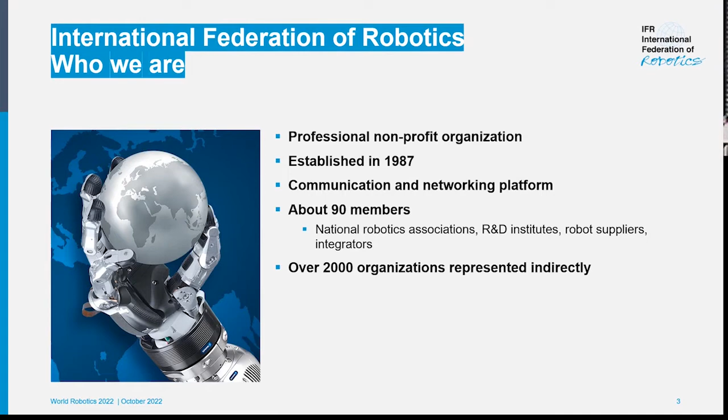If we continue a little bit on what the 3 pillars of IFR are, so what we will focus on today and what the main topic is, of course, is the robotics industry statistics that are published now. Also important is that we are the voice of the robotics industry and promote robotics globally. And we are also very active in policy support, both nationally and worldwide, supporting the adoption of robotics globally. But today our main focus is the statistics.

Before we really go into details of the statistics, let us talk a little bit about what is a robot, and maybe more importantly, what is actually not a robot. We use the ISO standard definition of a robot: an actuated mechanism that is programmable in 2 or more axes and has a degree of autonomy, moving within its environment and performing intended tasks.

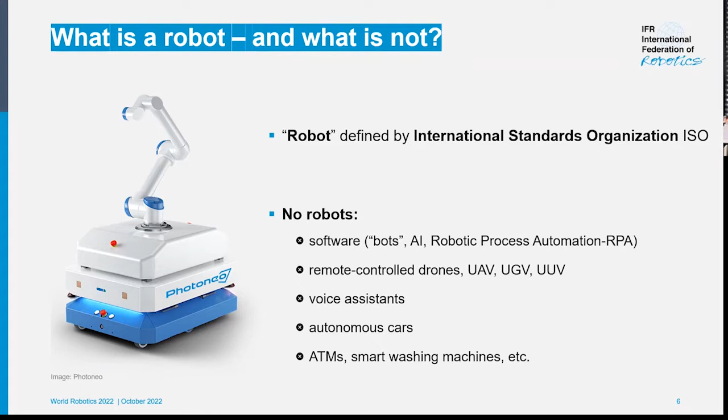Another way to look at it is saying what is not a robot. Software standalone is not a robot—software is a very important part of a robot, but not a standalone. Bots and the like are not a robot. Remote control drones, also not. Voice assistants, autonomous cars, ATMs and the like are not included in this definition. We will only focus on the ISO definition of robots today.

We are not only publishing one book today, but there are 2 books. One of them is focused on industrial robots, and the other one is on service robots. If we want to make life very easy, what is the difference between an industrial robot and a service robot? We could just say that the service robot basically doesn't produce anything. That would be the short version.

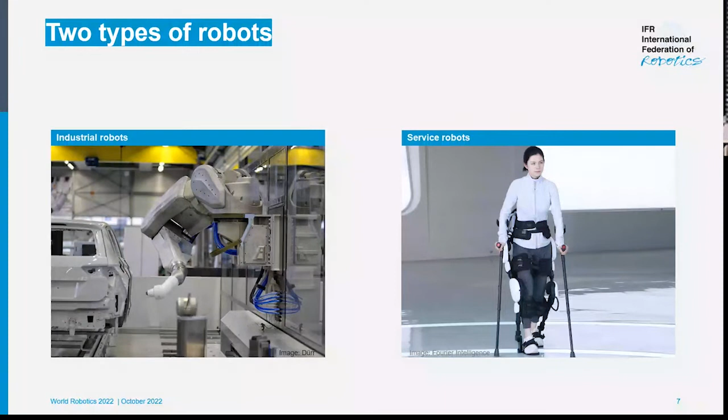So with that, I think it's time that we really go into and see what happened in 2021. It's really been a remarkable year. For those of you who were here at the press conference last year, my predecessor Milton talked at that time about COVID as an automation booster. And we can clearly say, looking at the figures for this year, that the automation booster has been ignited.

It has been a very strong recovery from the pandemic years. We have the highest number in history now—over 500,000 units installed in 2021, an increase of 31%. That gives us a very impressive CAGR between '16 and '21 of 11%. That also means that the robotic stock around the world is now up to 3.5 million units, having grown 15% from the previous year, with a CAGR of 14%.

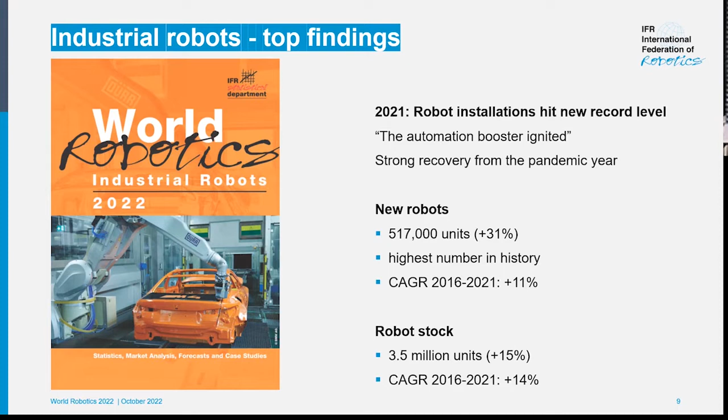Clear is that this growth has been in all geographies, all segments, and with all applications, as we will come back to in more detail during this presentation. If you look at the figures, in 6 years the number of installed robots has more or less duplicated, which is a very remarkable development.

Again, it is everywhere, geographically and segment-wise. We had the pandemic years where there was a bit of a flattening in '19 and '20, but now we are back to record high levels with 517,000, a 31% increase.

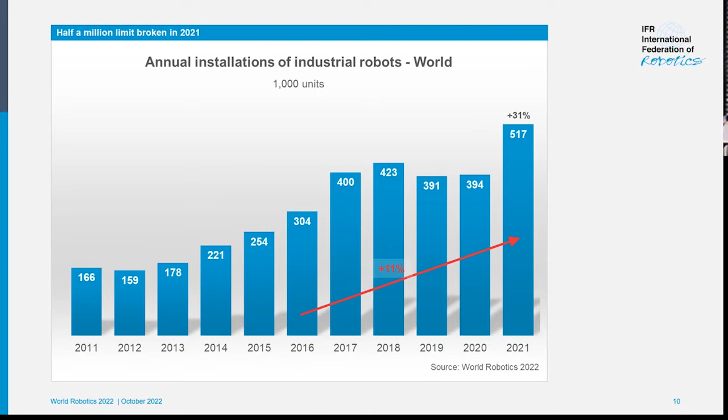The robot stock is growing. Last year at the press conference we could tell that we had more than 3 million robots installed in the robotic stock. That is now up to almost 3.5 million, also an increase of 15%.

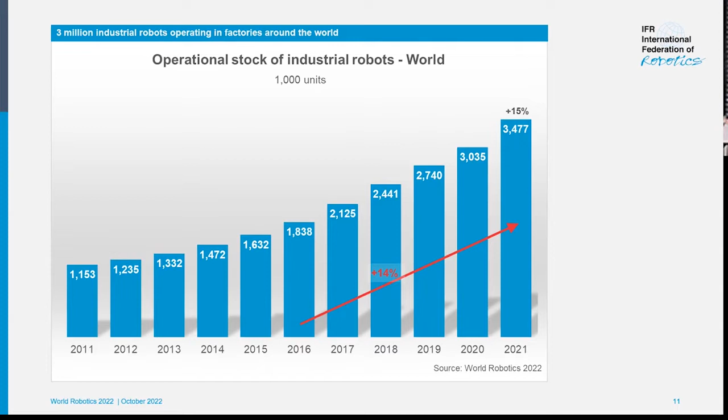Looking at where and how robots are used, already 2 years ago the electrical and electronics area was where most units were being installed, and that trend continues now for the second year in a row. There was growth now of 24%, a steady growth for several years.

In the automotive, metal, and machinery areas, last year was a bit of a decline in both, but they are now back, showing growth rates above 40%, especially automotive, very much driven by the EV development we are seeing.

Plastic, chemicals, and products continue their strong growth with almost 30%, and food also with almost 18%. So all segments showed strong, double-digit growth during the last year.

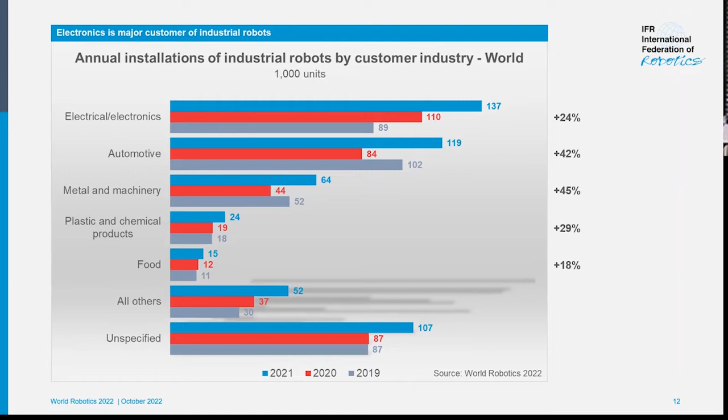If we look at collaborative robots or cobots, there's a lot of attention in the market today on cobots, and here too we can show record figures with almost 39,000 new units installed, a 50% increase from the year before.

However, the cobots' part of the entire market is still not really big. It's 7.5%, but it's growing very rapidly.

Interesting, especially with cobots, is that these are not replacing the more traditional robots, but really opening up new segments and new types of customers. We see a lot of small and mid-sized customers and new applications using this interesting technology—a 50% increase, as we can see.

Looking at it from a geography point of view, there's strong growth in all 3 main regions. Asia and Australia showed growth of 38%, giving a CAGR since '16 of 14%. Europe grew 24%, CAGR of 8%, and the Americas grew 31%, giving a CAGR of 4%.

That the Asia-Australia region is so large is of course not surprising, since 3 out of the top 5 countries using robots are in Asia.

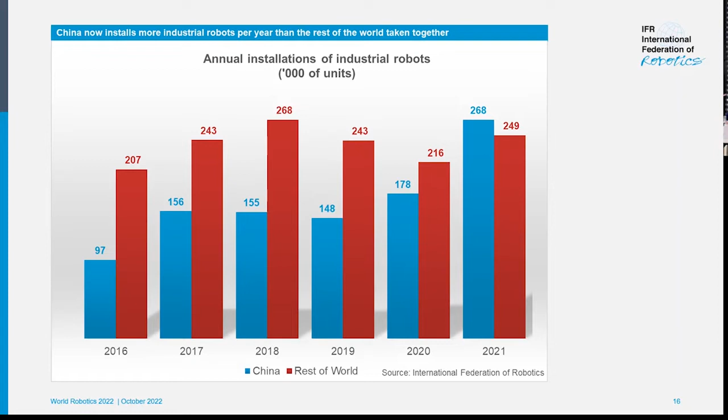This has been driven by all segments, but we also see strong recovery in the EV part. So, looking more into only the China figures, with that I will hand over to Christoph. Thank you, Marina.

Let's have a closer look at China on the timeline. Here you can see the tremendous growth of annual installations over the past decade. It was a CAGR since 2016 of plus 23% each year.

Of course, if we look at individual years, we see some fluctuation, some volatility, which is quite normal. But what we can also see is that in the pandemic year 2020, the Chinese number of robots installed grew, and now it surged by 51% year on year in 2021. And this obviously drives the total for Asia that we report.

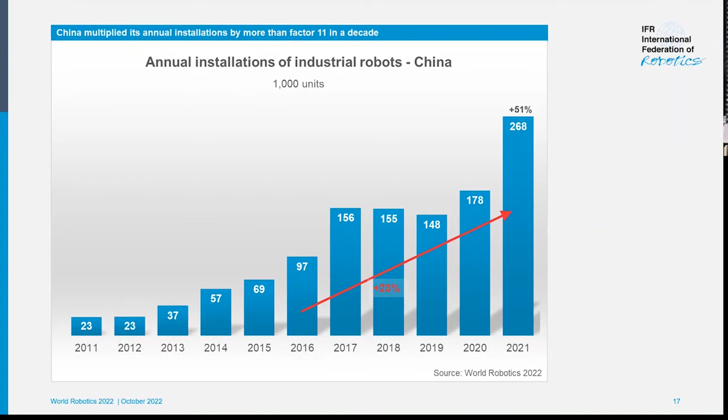But even if we had a closer look at the other countries, we would see that the number is growing at different ratios. Have a closer look at the industries. We can see that China has a strong electronics industry, strong demand from this industry, plus 38% in electronics is remarkable, but even more remarkably, the number of robots installed in the Chinese automotive industry almost doubled, plus 97% year on year.

And this is obviously driven by the intent of the Chinese automotive industry, not only to increase the share of what they call new energy vehicles, which is battery electric vehicles, but also other alternative types of powertrains. There's a lot of investment going on there, which you can see the results in the figures. But also all the other industries are growing strongly. Metal and machinery plus 55%, rubber and plastics plus 22%, food plus 14%.

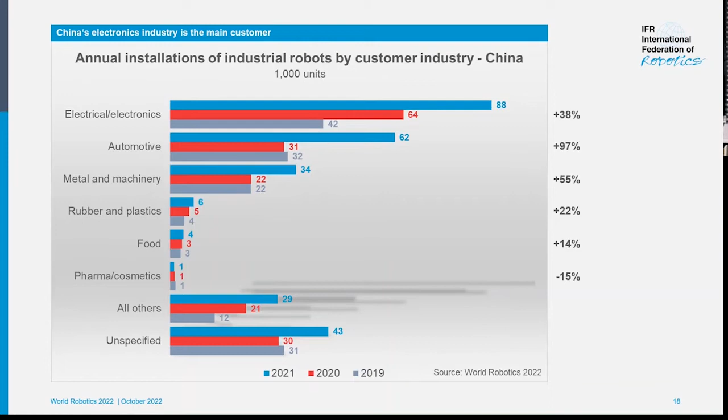If we compare the United States, in contrast, we can see a rather moderate growth of plus 2% on average each year since 2016. And also in 2021, we had a recovery and we exceeded the pre-pandemic level from 2019. We had 35,000 robots installed in the US, which is the second highest value ever recorded. Numbers in 2018 were even larger, the 40,000 unit mark was reached.

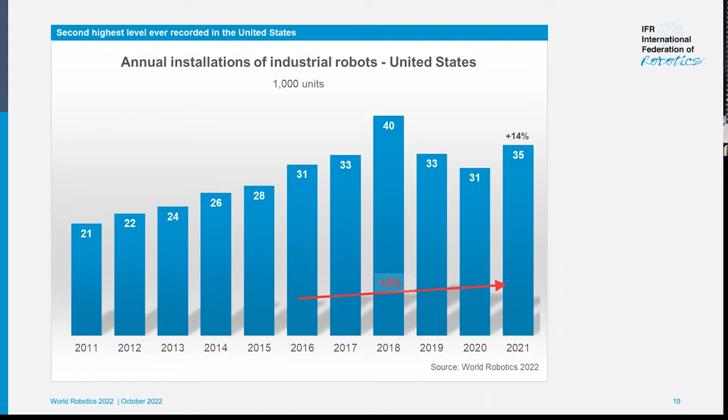If we have a look at the industries here, we see a slightly different picture. We can see that traditionally the United States was driven in robot demand by the automotive industry, and we are seeing declining figures here. On the other hand, we see what we call the general industry, which is manufacturing without automotive, having strong demand for robots.

We can see metal and machinery up 66%, plastics and chemicals plus 30%, food plus 25%. Electronics is not fitting in here, minus 23%, but there we had a very strong year the year before, so the base was very high. And this is a general trend that we see in the United States: robotic automation is moving towards the general industry and getting based on more customers than just automotive.

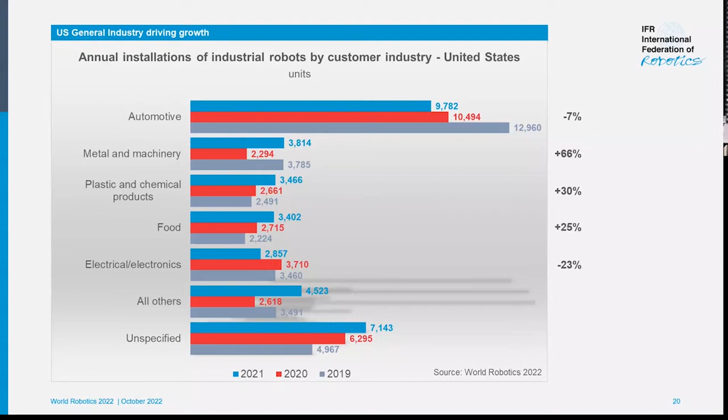On the next slide, we are having a closer look at Germany. In Germany, we have a rather steady market with a growth of plus 3% on average each year since 2016. Last year, we had plus 6%. In 2018, there was a one-off peak, with very strong demand from the automotive industry. But overall, we see a rather steady development, and interestingly, not that much cyclical behavior, not that much volatility as we know it from other markets.

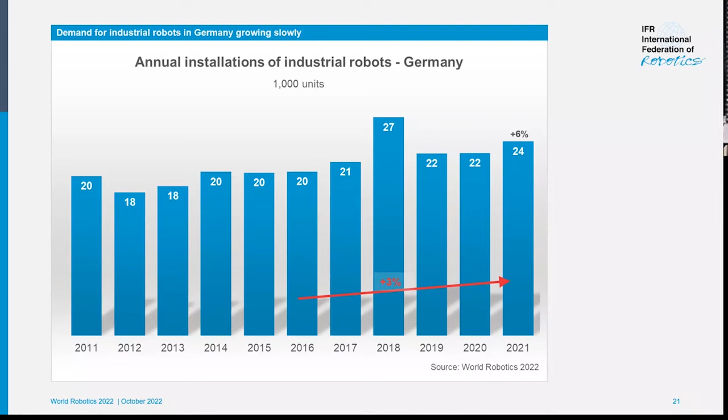Looking at the industries here, the German robot market is still very much driven by demand from the automotive industry. We have split this in this figure into two groups: motor vehicles, that is car manufacturers, OEMs themselves, and automotive parts with suppliers, which rank 1 and 3. If you put them together, you can see that the automotive industry is by far the largest customer. Then we have a strong metal and machinery in second.

And we also have rubber and plastics demand. You can see again that the general industry, metal machinery plus 33%, rubber and plastics plus 49%, even electrical electronics plus 10%, pharma, cosmetics plus 15%, is growing, while demand from automotive is declining by single-digit rates. So this is, again, a trend that we observe.

In addition, we see a market for, let's call it good enough robots or low-cost robotics, that are addressing these new customers in the general industry. What does it mean? It means that we have a lot of very high-performance robots that have a very high speed, very high precision. They are very durable. You can use them for more than a decade, and they are still precise and quick.

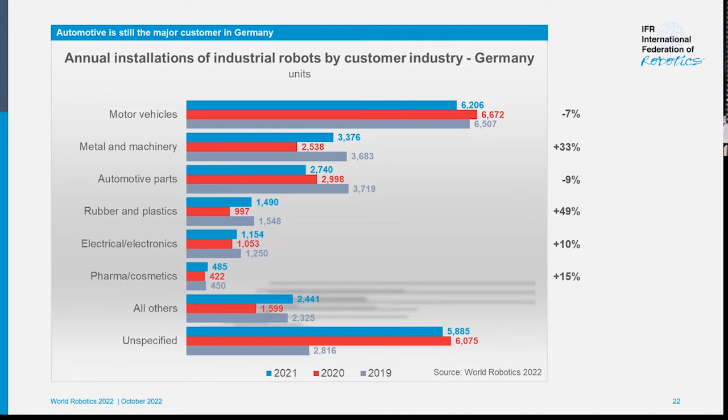But for many customers, this is not really a decisive criterion. Maybe they never used a robot before, and buying a very high performance unit is a rather large barrier. This new segment of low-cost robotics addresses companies that maybe just want to try out robots, but also those who don't have such a need for precision, maybe on the hundredths of a millimeter, or they are satisfied with a robot that is just good enough for what they want to do. This is really important to get robots in a lower price segment to address these new customer groups. And this is where we think this is driving Germany a little bit and growth here.

And this will give me the next topic, trends and forecasts. So right now we had 31% growth and more than 500,000 units for the first time in history. But at the same time, we still see full order books.

Of course you all know about supply chain issues and scarcity of electronic components, and this is affecting robotics as well, like everybody else. That's why we think this year and the following years will still see growing numbers of robot installations. The full order books will carry on at least until mid-2023.

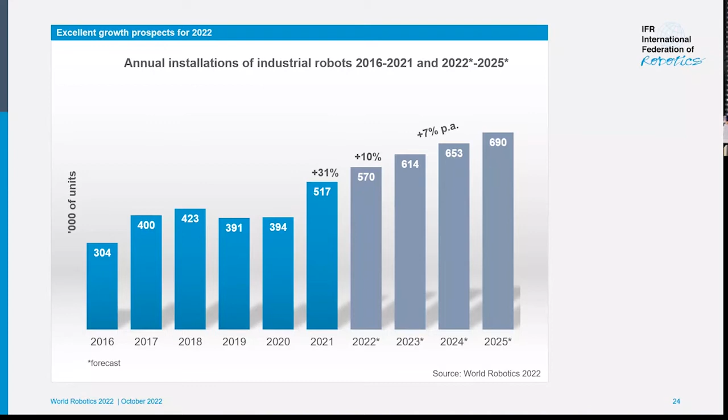There are also a lot of other effects playing into this forecast. On one hand, we have macroeconomic headwinds like inflation or a tightening monetary policy, especially in America and Europe, which is not good for investment, but we already have full order books, so in the short run this will not affect us much.

And then, of course, we have some geopolitical tensions. The bottom line is we have a lot of uncertainty in the economy worldwide, and this is always hampering investment decisions. Still, we see some important markets, some important parts of the world that have more or less strong and strict COVID restrictions, which hamper business activities.

As I already said, on the other hand, we have full order books, and we need some time to deliver all these orders and install these robots. We still have strong demand from the electronics industry because scarcity of electronic components means we cannot produce as much as is demanded in the market. So we need more capacity.

There was a lot of political support measures put into place worldwide during the COVID pandemic, which is still active. Many of these things, like tax deduction benefits and other political measures, are still in effect and are still fostering investment into modern production technology in general. And this, of course, involves robotics.

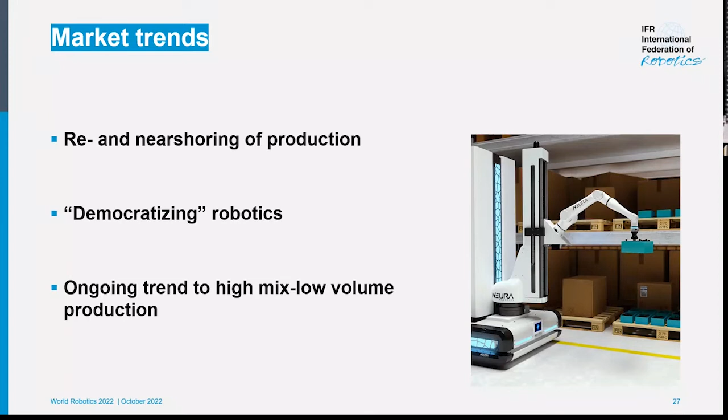Finally, we still have the trend for high mix, low volume production, which is something that we can do in a digital supply chain where we can flexibly produce on the customer's needs without having the costs of highly individualized development and production that we used to know from the past.

On the technological side, we clearly see the trend towards sustainable development. This means customers are trying to reduce their carbon footprint in production. Robots support this in several ways. Modern robots are more energy efficient, but also the quality provided by a modern robot produces fewer rejects.

So the input-output ratio improves, and this automatically reduces the carbon footprint because the carbon emissions from the rejects are not there anymore. We don't need to produce just to reject it afterwards.

We also see advancements in adjacent technologies, for instance machine vision, but also software and artificial intelligence. These technologies are not robotics in the core, but they help to make robots more efficient, more productive, more reliable, helping them do things quicker and more reliably than before. Finally, as Marina already said, human-robot collaboration is a steadily developing field, and we will see a lot of advancements there in the near future.

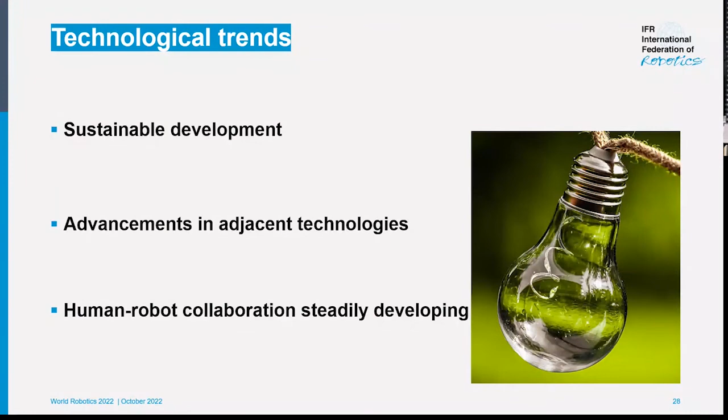Germany, Japan, China are just some examples. We see the share of elderly, retiring people becomes larger compared to the small fraction of young people following. This creates a couple of challenges for all these economies. For once, these people are missing in the workforce once they retire.

This creates, in conjunction with the small number of young people, a large problem on the labor market, because we have a labor shortage, old people retiring and fewer young people following. We also need a lot of workers in care professions, but we also have a lot of other issues beyond manufacturing, which open up new opportunities for robotics. Just to name some examples: intralogistics in factories and e-commerce, professional cleaning, inspection and maintenance, hospitality, agriculture. And I'm glad to hand over to Werner Kraus now, who will present more details on this.

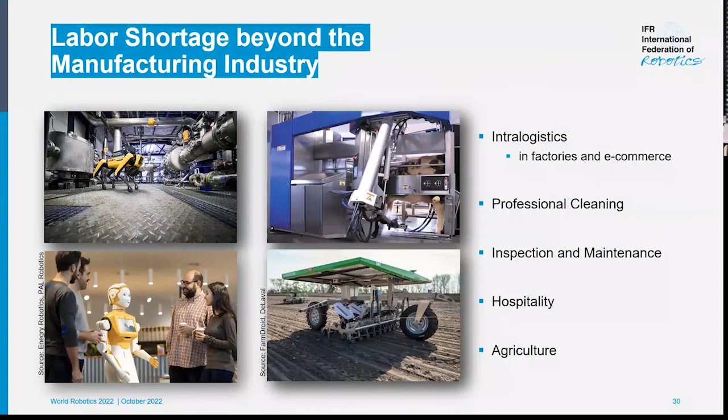Thank you, Christopher, for the introduction. Robotics goes far beyond manufacturing. When we look at our megatrends—demographic change, but also globalization, sustainability, digitization—we see a huge demand in the end user markets for new solutions.

For example, in the elderly care sector worldwide, more than 50 million healthcare workers are missing in 8 years. Or when looking into logistics, it's estimated that in 2026, almost a quarter of all retail is done online. So there are workers needed, or robots in the warehouses, to do order picking tasks.

On the other hand, we are still building new houses, which means we also need professional cleaning services to clean these new square footages. For example, in the US it's expected that building square footage will rise by 39% in less than 30 years. And on the other hand, we still have too little building capacity. This housing crisis means we need much more construction, and the estimation is that 1.6 billion people will be missing housing by 2025.

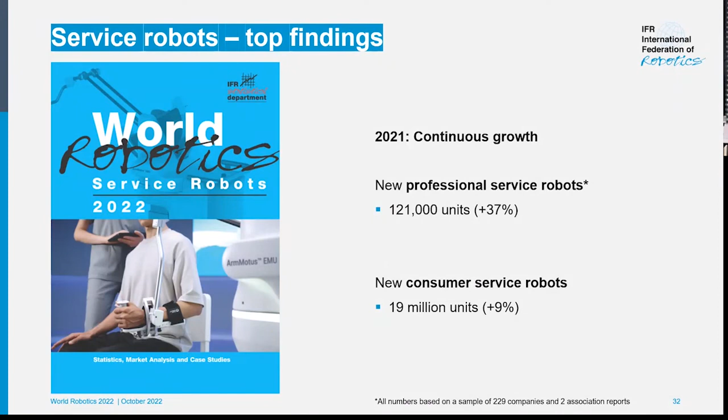Looking now into the verticals, these are the top 6 applications for professional service robots used in a professional context. In logistics, almost 50,000 robots, a growth of 45%. In agriculture, there are 8,000 robots, growth rate of 6%. Cleaning is also rising a lot, by 31%. We also see big growth in the medical and healthcare section, by 23%. Hospitality—the sector of restaurants, for example—85%. And in maintenance and inspection, think, for example, of the Nord Stream pipeline which had a leakage; that's a typical task, to inspect such a pipeline with a robot. There we have an increase of 21%.

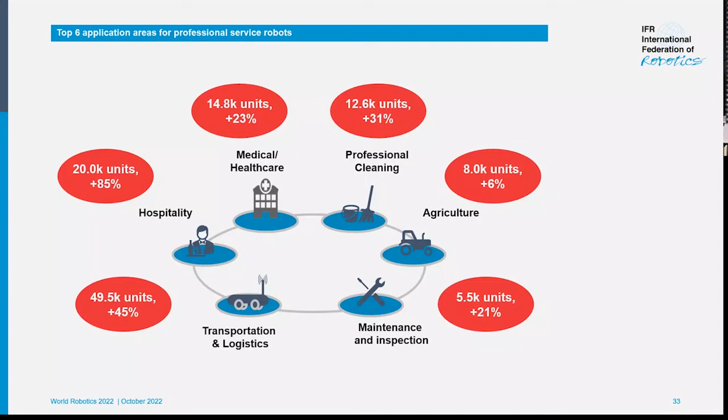Let's look into some of the most important verticals for service robots. In transportation and logistics, today most robots are autonomous mobile robots. They move goods, pallets in logistics, but also, for example, in restaurants there are AMRs deployed, driving between the kitchen and the guests—that's transportation and logistics robots today. The future trend is that these AMRs not only drive on the ground, but also have robot arms to make item picking, for example, for micro fulfillment in supermarkets, or pick and carry tasks in hospitals, or order picking and commissioning in warehouses. Due to increased online retail, we have big market growth in this area.

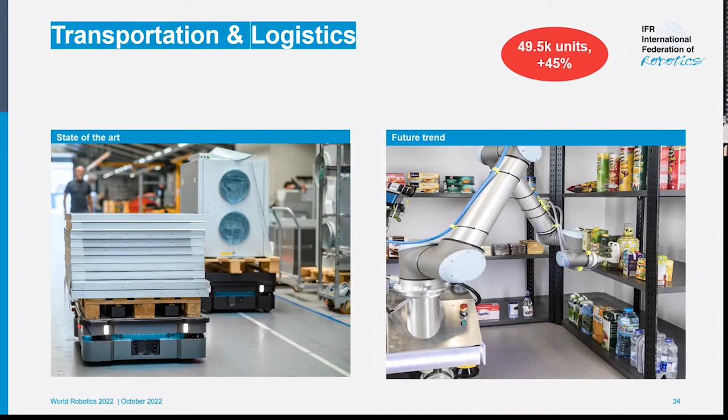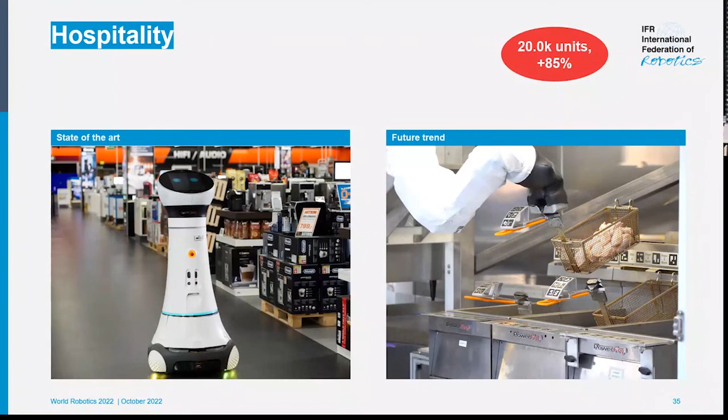When we look into hospitality, as of today most robots are basically performing information assistance—something like an Alexa on wheels, giving you information on where to find goods. We see a clear trend that these robots in the future will also perform physical tasks, for example cooking in restaurants, where we also have a big shortage in this area of hospitality.

When we look into the medical sector, here we also see a rising demand for assistive systems due to the demographic change.

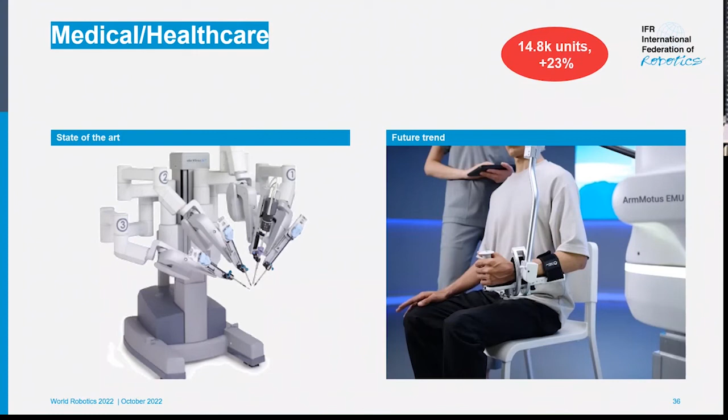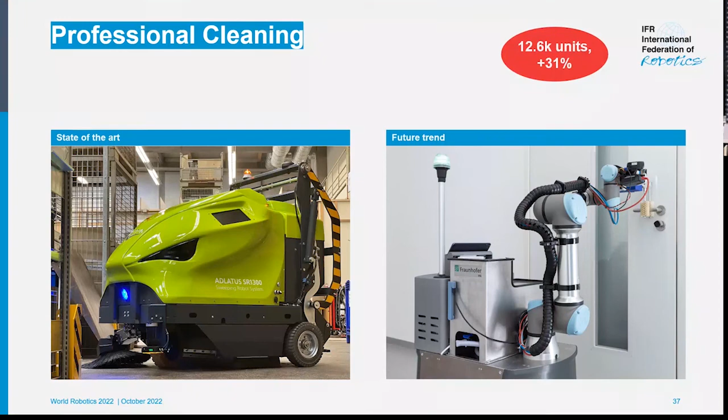But now let's look into the market structure. We have now seen such top 5 application areas of service robots.

Worldwide, more than 1,000 companies are producing, developing, deploying these robots, and around a quarter of them are located in the United States. The other big service robot supplier hotspots are China and Germany.

You can also see that there is a combination of established companies and also startups. Startups means that they have, on the one hand, a product on the market which you can actually buy, but they are not older than 5 years. We will look into this startup market in a couple of minutes.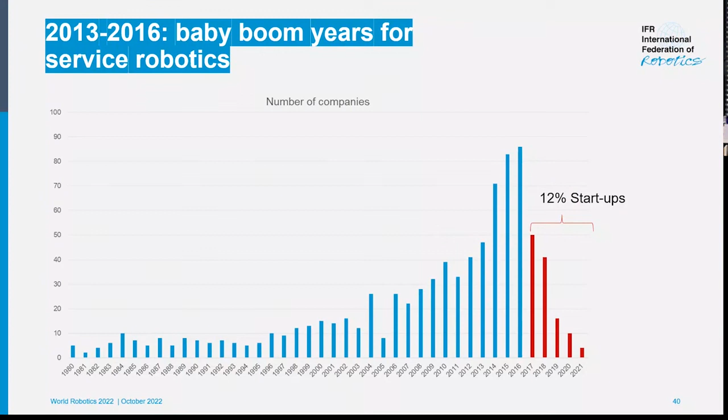And we now see somehow less startups. So currently we have a startup rate of 12%. So out of this around 1,000 service robot suppliers, 12%, around 130, were founded in the last 5 years.

To conclude the presentation for service robotics, we see that this demographic change, the lack of skilled staff, is really acting as a catalyst. It accelerates the development, deployment, and use of robots.

And of course, such a robot is also a question of investment. The typical service robot users are used to paying salaries, a monthly salary. And now they must think, okay, I don't find the people anymore, maybe I buy now a robot. So it's a question of paying salary versus investing into the robot. They are switching the cost type.

And at this point, robot as a service comes into the game as a new business model. So instead of buying a robot, for example, for 50K, you can basically rent the robot as a service. So you have again a monthly fee which you pay for the robot, and it's the same kind of cost type for you.

And of course, we have lots of technology advances which will further boost the capabilities of the robot. They will become more dexterous, more intelligent, also connected. And I guess it's really a perfect match of market demand on the one hand and technology push on the other hand.